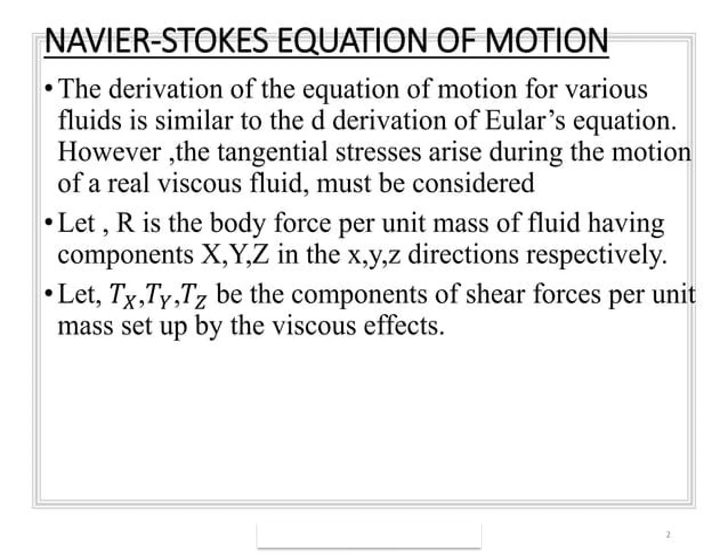So derivation of this equation starts with creating a three-dimensional body. So starting with Euler's equation, it includes tangential stress in the x direction, y direction, and z direction. Tx, Ty, Tz are the components of shear force per unit mass in the x, y, and z directions. The need for x, y, z directions is that the shear stress acting in the x direction will have an impact on the y direction and also the z direction. Similarly, all shear forces will have an impact on all other directions.

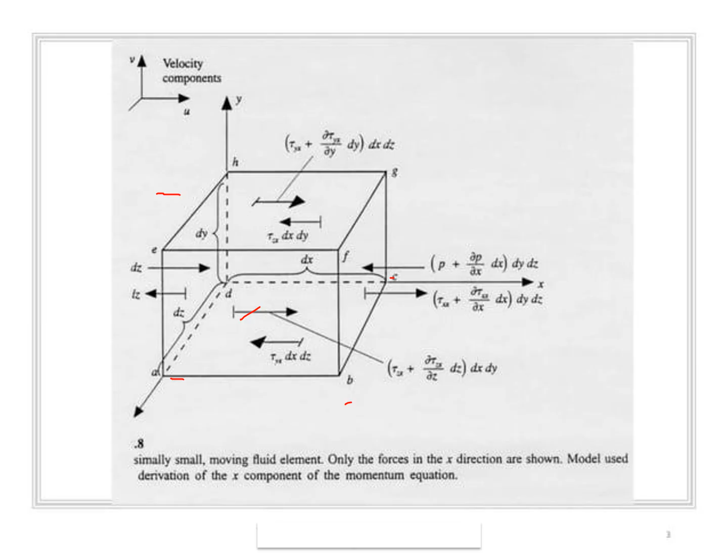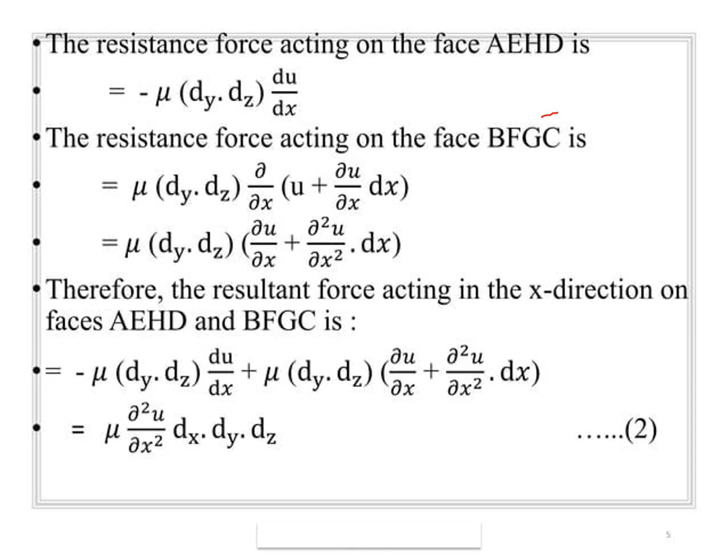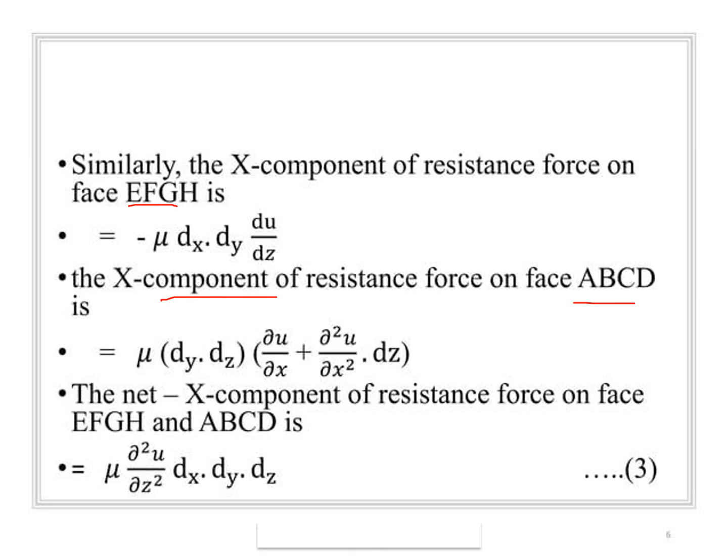The net x-component of resistance forces on the faces EFGH and ABCD are mu into dou squared u by dou z squared dx dy, and similarly, for the HGCD and EFBA faces are dou squared u by dou y squared dx dy dz. The total viscous resistance forces are calculated for all the directions, that is in the x direction. So when you remove the common terms, you will get this equation, that is mu into dou squared u by dou x squared plus dou squared u by dou y squared plus dou squared u by dou z squared dx dy.

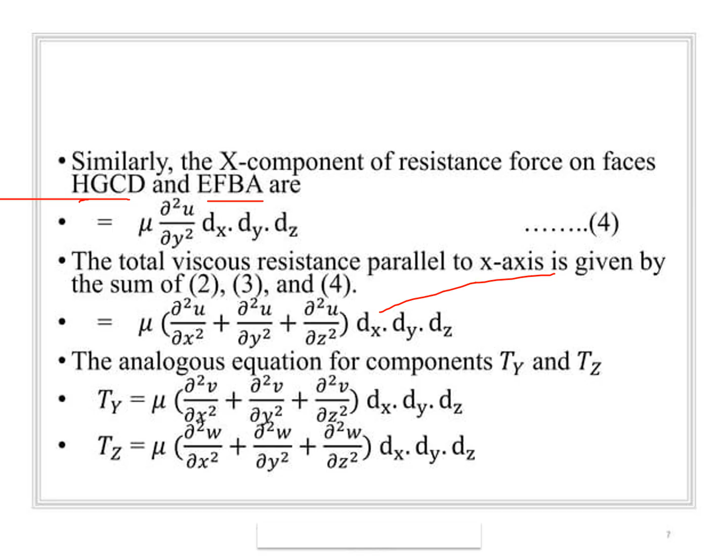The analogous equations for the components Ty, Tz are these. Then for the x direction, when you bring everything into this equation, you get this equation. So we are calculating only for the x direction, dividing the equation throughout by rho into dx dy dz, we get, for the x direction, 1 by rho dp by dx, du by dt, nu into dou squared u by dou x squared, dou squared u by dou y squared, dou squared u by dou z squared.

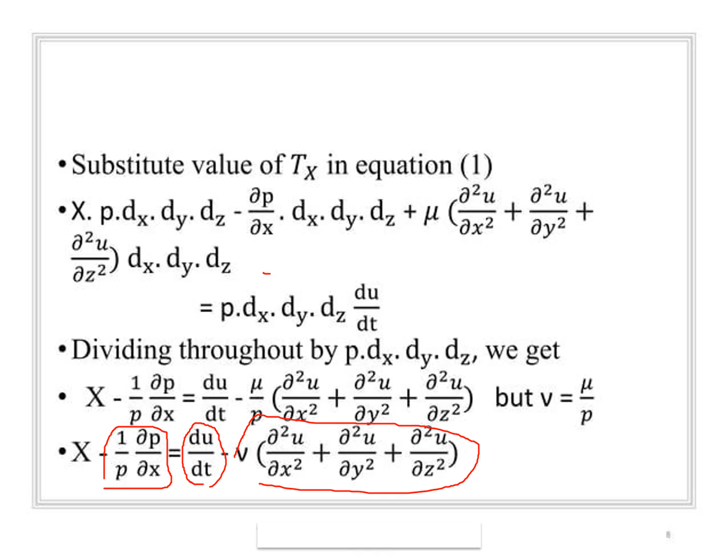So this is the pressure term, which helps us to calculate the pressure acting on the fluid element. This is acceleration of the fluid element. This is the velocity variation in all directions. And nu represents the kinematic viscosity, with the density of the fluid. Similarly, we can calculate it for the y direction and z direction.

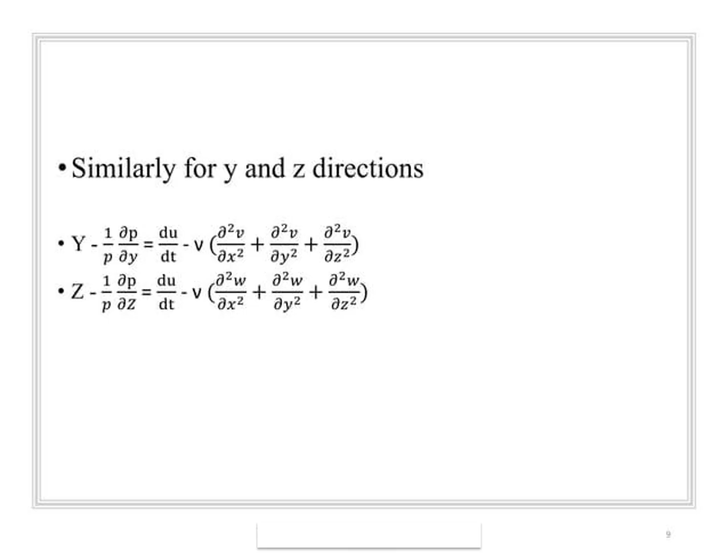So the applications of Navier-Stokes equations are vast. It is applied mainly in calculating the flow velocity around objects and also inside objects, mainly used for external aerodynamics in terms of propulsion, and also how the fuel is mixing with the air. So the Navier-Stokes equation helps us to create a mathematical model for calculating the turbulence velocities also. So this Navier-Stokes equation leads to turbulence modeling also.